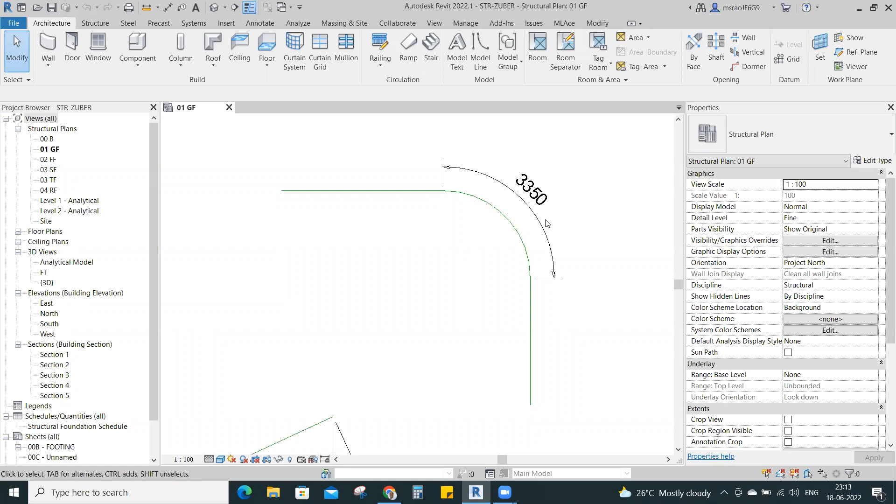So to create a different dimension, again we need to select one object. If you select this dimension, you can see the edit type. If you observe our entire journey with Revit, whatever we required, we are going to edit type. Whatever we want to create new, we go to edit type. So without edit type, we cannot imagine anything in Revit. So now to create a different dimension style, I am going to edit type.

In the edit type, I create a new type by duplicating the existing one. Let's say if you see the type here, we already have different types. A few of the things: arc length 3mm arial, arrow 2.5mm arial. Different dimension styles are there. Now I want to create my own dimension style.

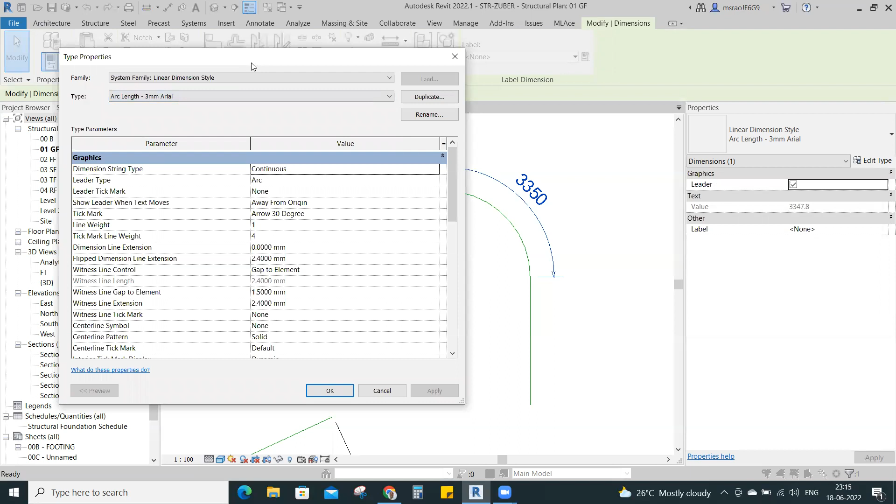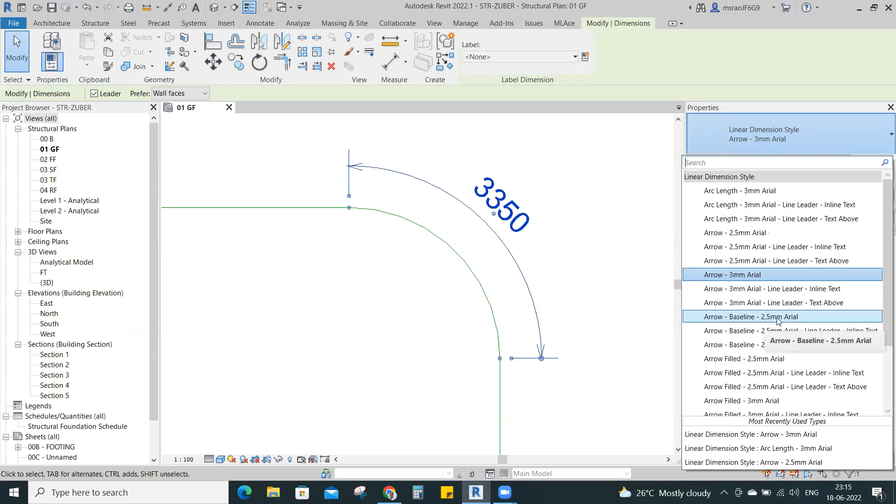Let's say, before creating the new one, let us change the one dimension style with a different style. This is one style which is linear dimension style, arc length 3mm arial. Next I am going to change to arrow 3mm arial. See, small difference, more or less looks the same. And I am going to change into arrow baseline 2.5. Looks more or less the same.

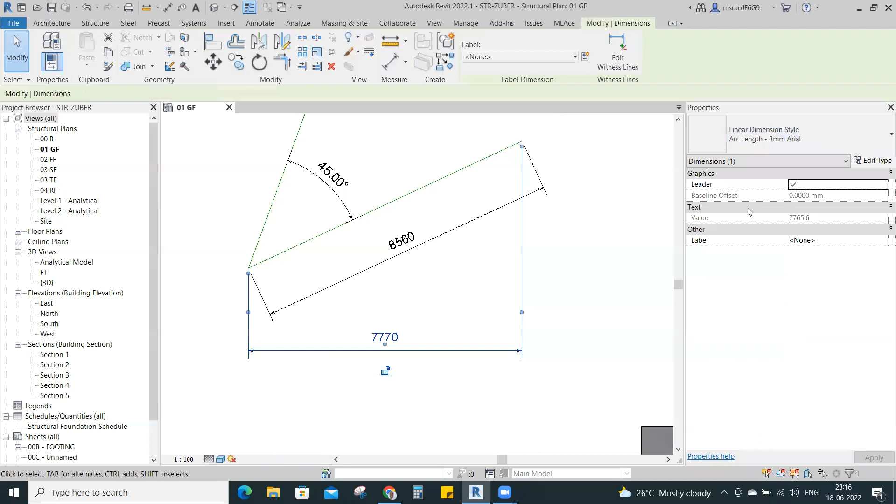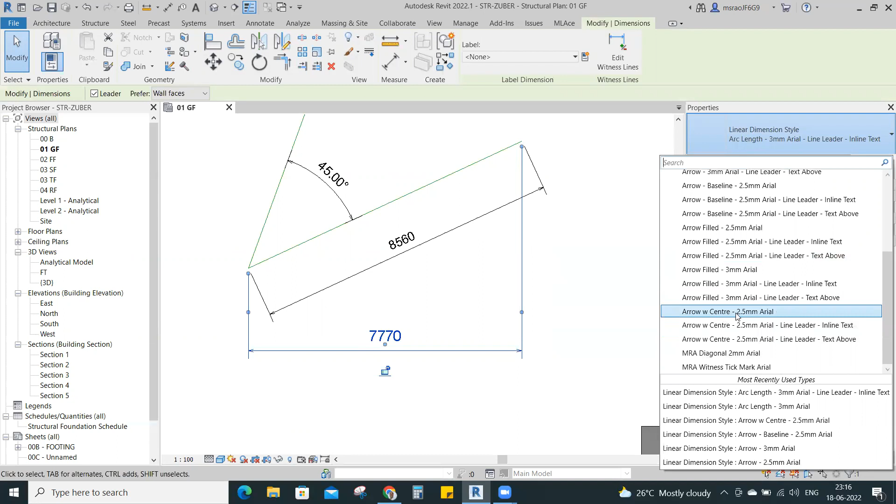I'm going to change this dimension into a different dimension style, arrow W center 2.5 arial. More or less same, we cannot see any difference. Let's say now I'm going to change to arc length 3mm arial, then arc length 3mm arial with line leader and inline text. More or less same. And if you change into 2.5mm, see, only the dimension text height is changing.

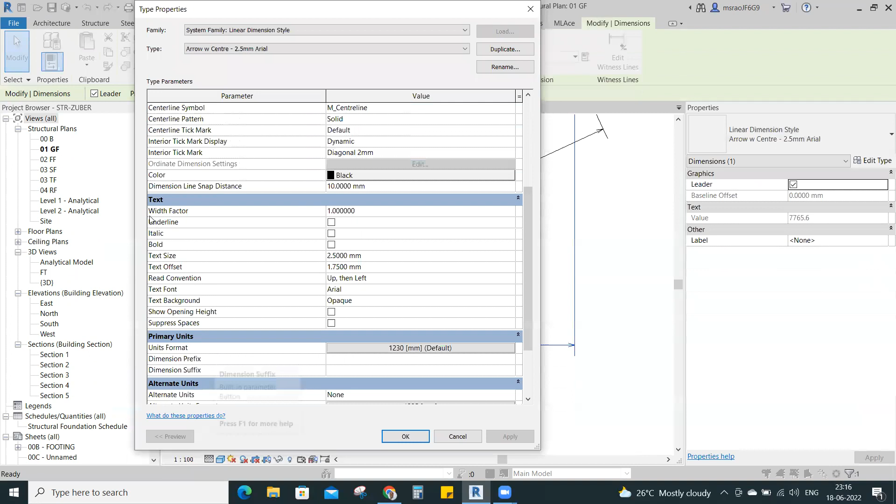If you go to edit type, here you can see the different dimension variables, or dimension parameters. If you read one by one: graphics, text, primary units, alternate units, and other things. In the text, you can see the text size is 2.5.

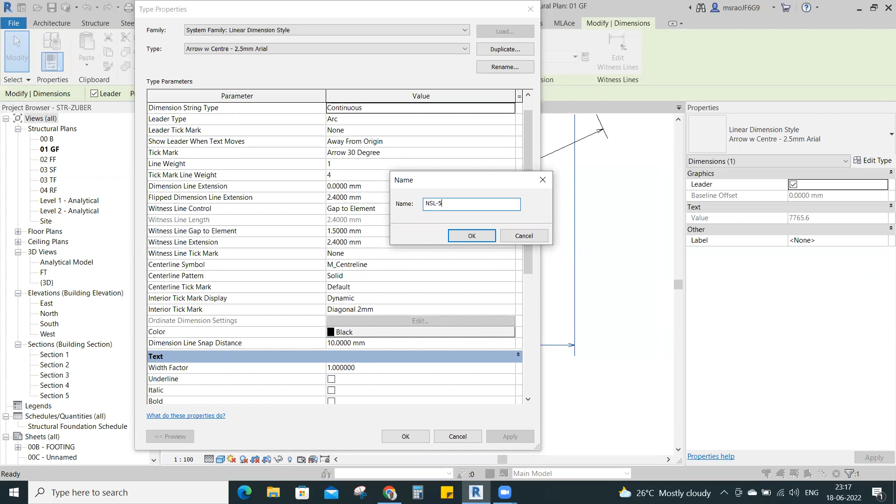Now I want to create one dimension style with the text size of 5mm. Now I'm going to change only the dimension text size. Let's say now I'm going to duplicate it. Here I create the new style, NSL hyphen 5mm. This is my style name.

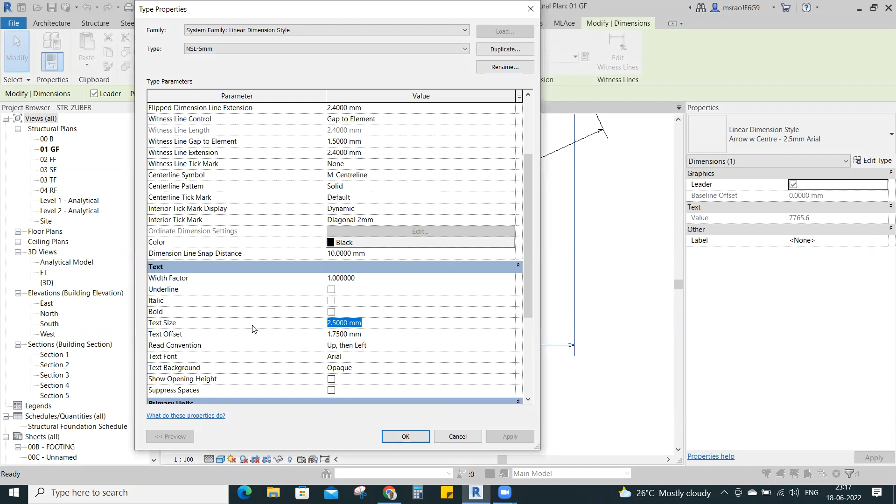So now what is the parameter I need to change? I need to change the parameter called text size, from 2.5mm to 5mm. Apply. See, now this is the style NSL 5mm.

If we want to go back, you can change it, it will change to the different style. Right, I'm going to select this - this is my new type of dimension. When we use Revit, we call a style as a type. Just I'm going to the edit type.

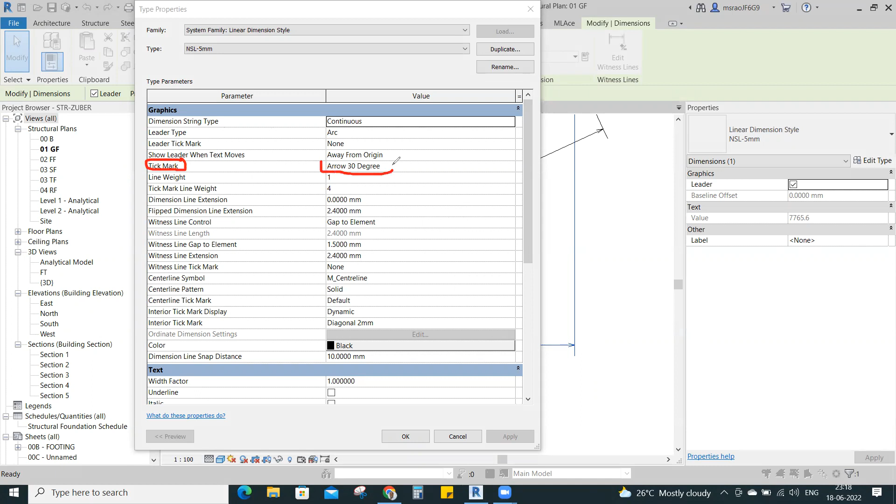Here I want to change the arrow style to the architectural tick mark. Again, if we read one by one, dimension string, tick mark is there. What is the arrow we have here? Arrow 30 degrees. Right, now I will change these things.

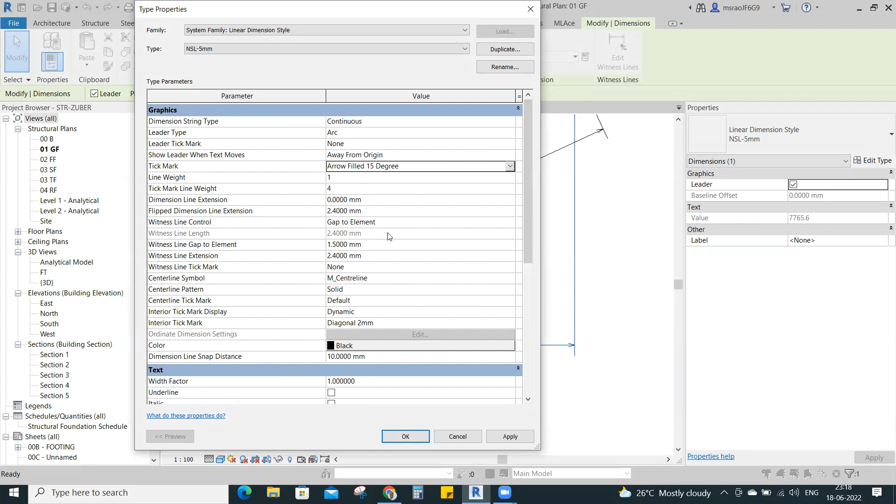I will go to tick mark and change to a different arrow type. These are all different arrow types. Let's say I want to create arrow filled with 30 degrees or 15 degrees to see the difference. If I apply, see, this changes the arrow style.

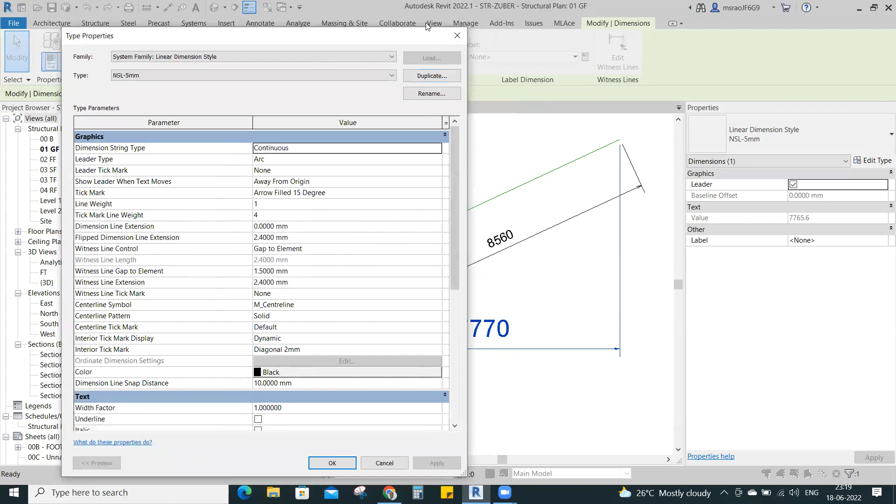Like this, we have to edit. Let's say to create the dimension style the first time, we have done the duplicate. After that, we are just editing, we are not duplicating anything because we already created our style. Now we are changing internal parameters only.

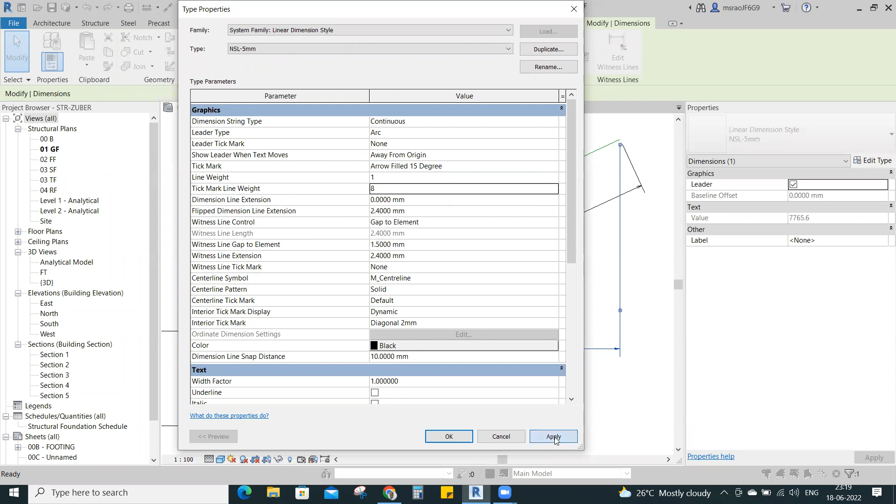Let's say, for example, line weight and tick mark weight. If I want to change, let's say, to 8 units tick mark, see now you can see it like this. When you go to thick lines and thin lines, you can see the difference.

If you want to change the thick lines and thin lines, just use the command called TL, thin lines. If you click again, we can see thin lines, thick lines and thin lines. We need to remember this option one more time: thin lines and thick lines, TL is the shortcut. If you place the mouse there, it will show the shortcut: thin line, thick line, TL.

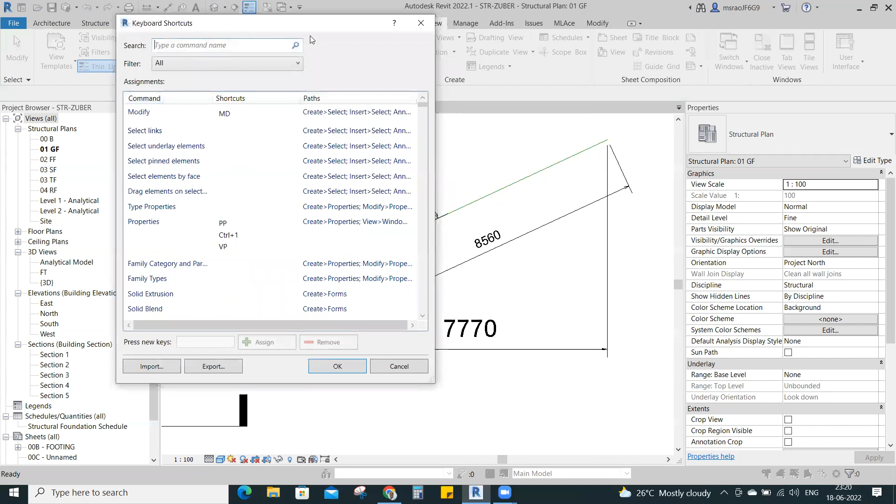By the way, I want to add one more command called keyboard shortcuts. If you go to user interface in the view, here user interface, keyboard shortcuts, we can manage our keyboard shortcuts. Let's say now we are using TL for thick lines and thin lines. Let's say, for example, I want to see others: for modify, MD; for property, PP; and trim or extend.

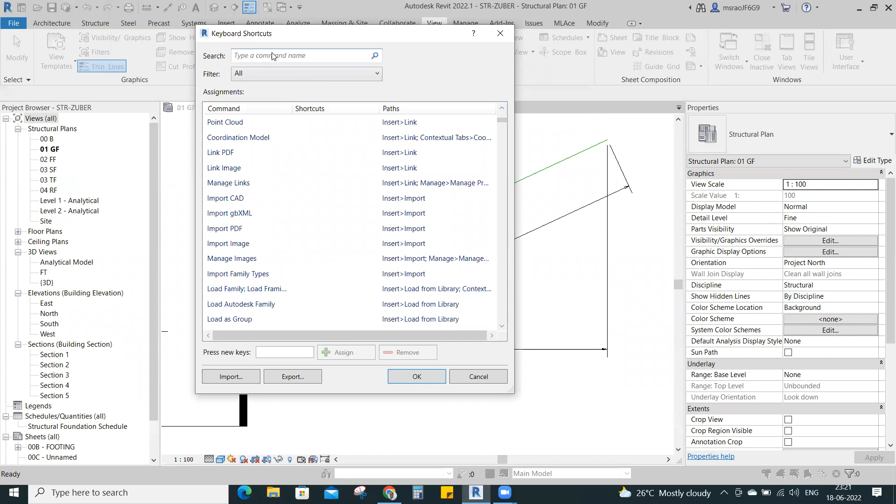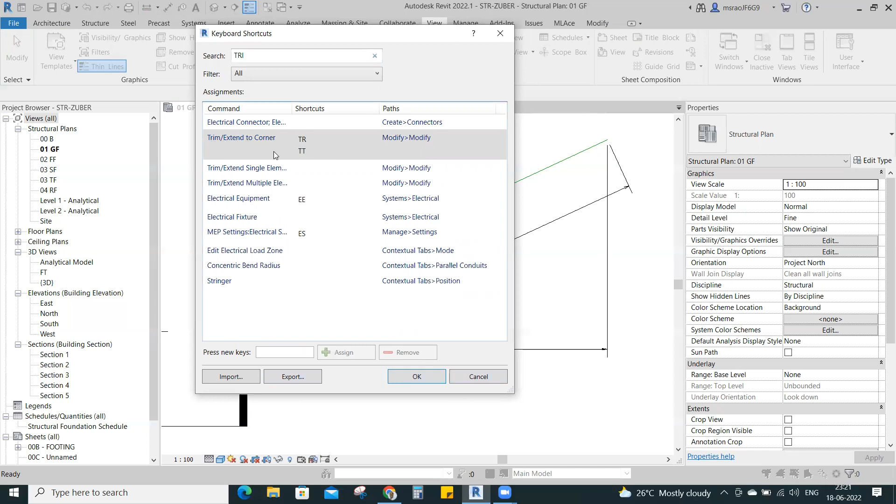See, trim or extend to the corner TR. Okay, electrical - these keyboard shortcuts are there. If you want to change them, let's say I want to use something else, I want to add TT. If I give the add TT, when you click TT, it will work as a trim or extend command. If you want to remove, select and you can remove. What I mean is we can manage our shortcuts according to our flexibility.

Only thing is here we will not use the enter, so we need to type only the shortcut.

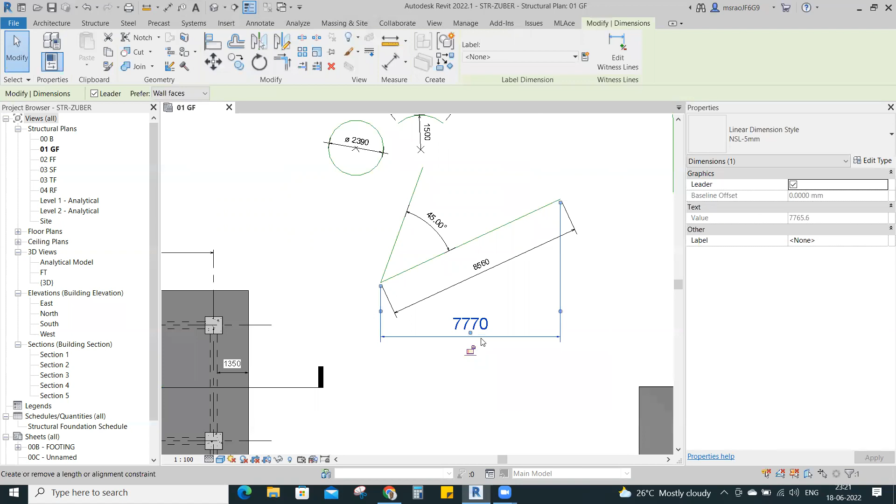Again I'm going back to the dimension style, go to edit. Here you can see the different witness lines. Let's say color of the dimension - these are the very frequently used factors. Now I changed the color of the dimension.

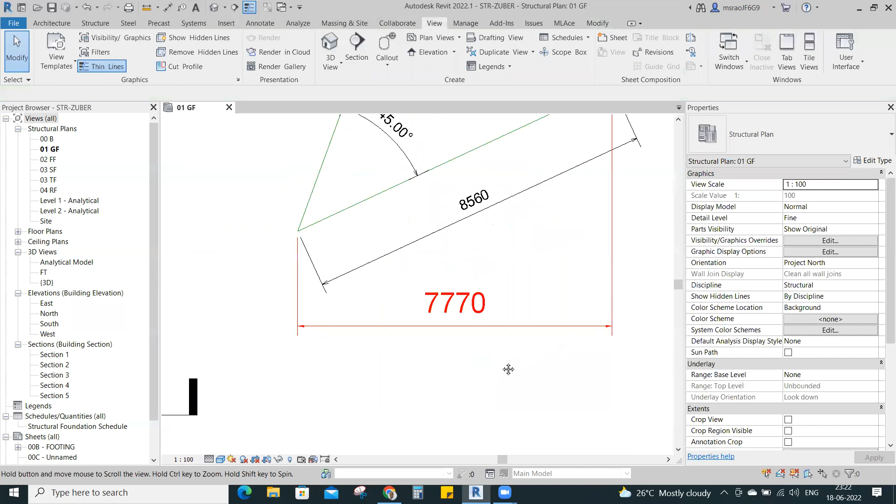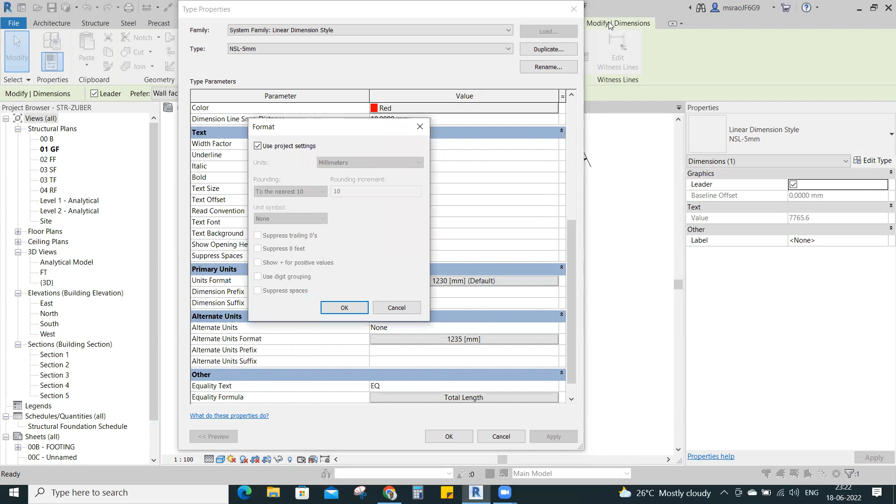Again I'm going to edit type. Here I'm going to the primary units, and I'm going to the alternate units. Primary units, it's already in mm. Now, if you see one option here, this is also one of the important options: use the project settings.

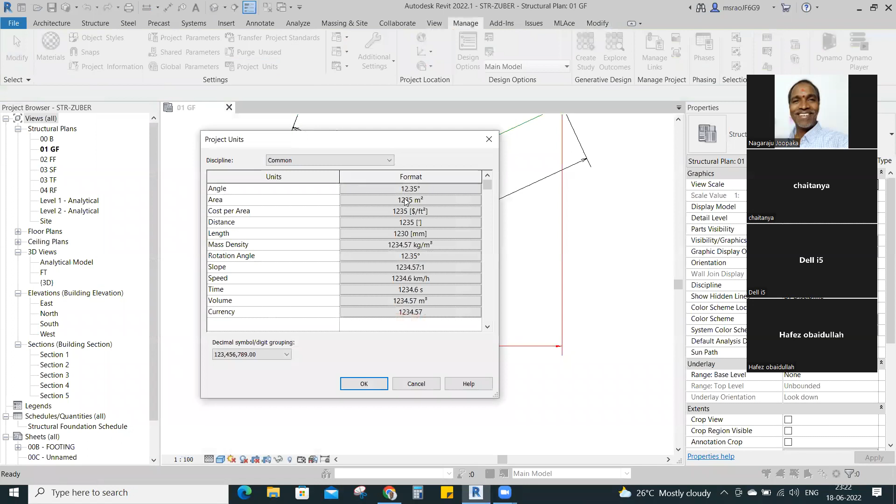This means, let's say if you go to the command called manage, sorry, manage project units, whatever we are setting the dimensions here, it will reflect here, in units parameter, primary units. If you remove it, you can change according to your requirement.

Let's say I want to change for a particular dimension style into feet and inches, feet and fractional inches. I'm going to make it, apply. See, now you can see it in feet and inches. But our project is in mm only, in millimeters.

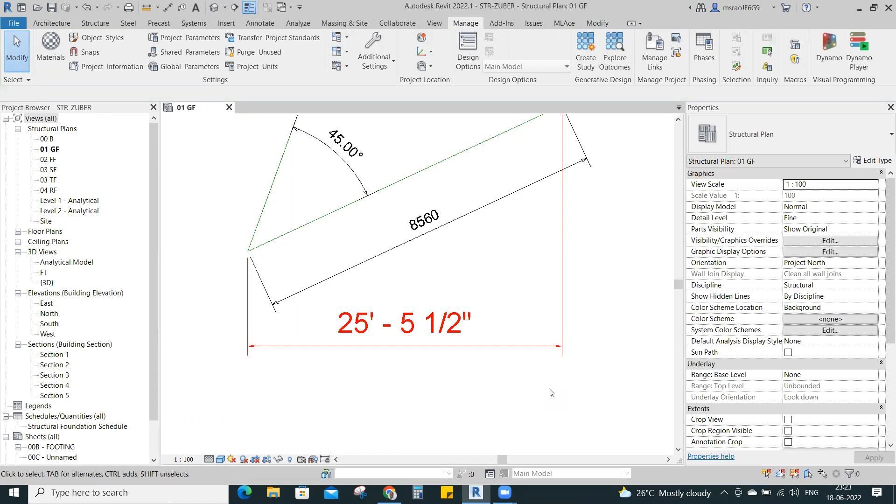But I can change a specific style with my required units. These are the primary units, you can say. If I want to use according to project template standards, I will use the project settings. Now it will change automatically according to the project.

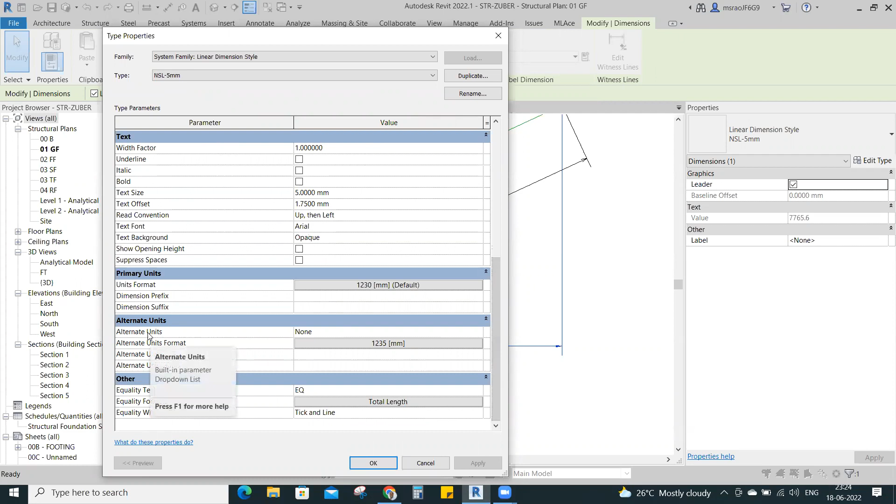Again, I am going to edit type. Here, alternate units - this is also one of the important options. Let's say I want to see my units in mm as well as feet and inches. So here I will go to this alternate units, to the right side or below. Which side do you want? Let's say I want to use below the dimension. What is my alternate units? I want to use my alternate units in feet and inches, or else only inches.

Okay, you can see the alternate units. If I want to use feet and inches, I will go to the alternate units. I create feet and fractional inches.

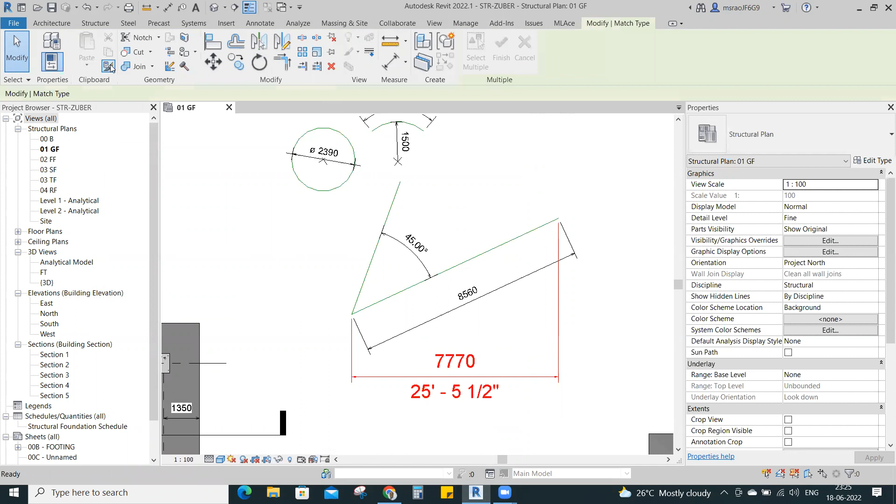Like this, let's say now if I change into these units, select it, I will go to match property, modify, clipboard match property - this property changes automatically to this.

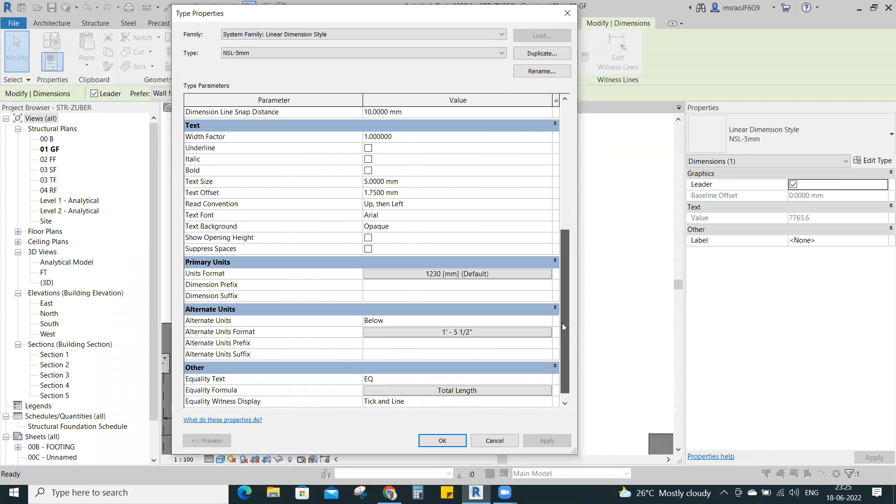This is a way to create our own dimension styles. Now I'm going to edit type to see all the parameters. I request one thing: while practicing, read each and every parameter, what is available there, so that you can understand. Whatever I explained, these are the very important things which we use.

For general projects, let's say we use dimension styles like bold or italic. So these kind of things also we can do - now we can get the bold and italic. I hope now it's understood: whatever we need to change for the dimension, we can manage with the edit type of that particular dimension.

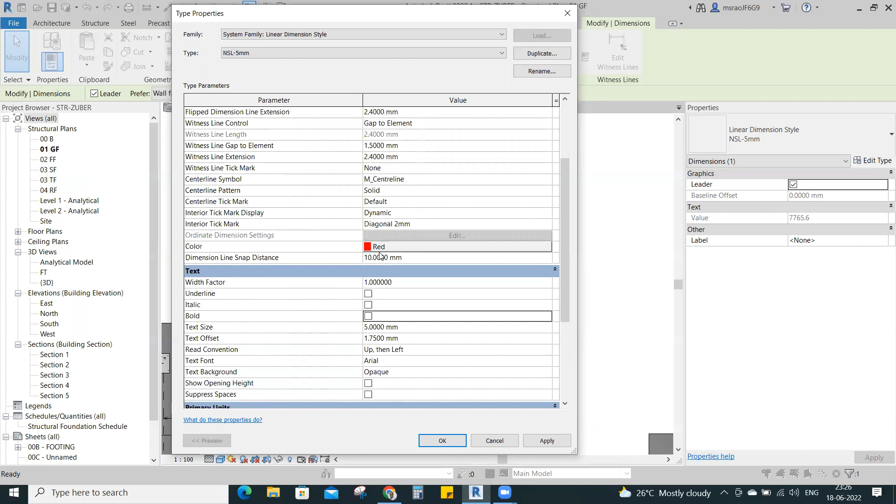One of the major things is text background - this is one of the important ones. Let's say something is overlapping with other objects; if you want to make the below object transparent, I will go here and make it transparent. We can see later also about this, just for information I'm giving.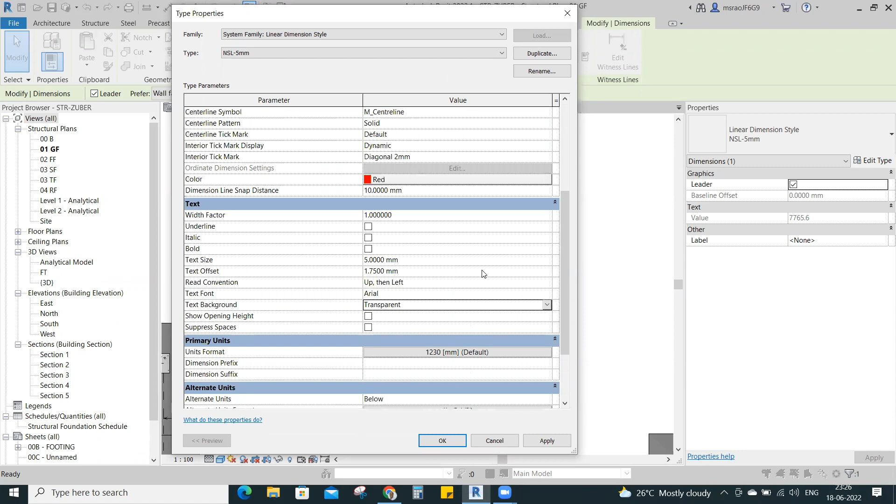These are the major required parameters of the dimensions. Let's say if we created any sheet, if you place the dimensions, it will reflect.

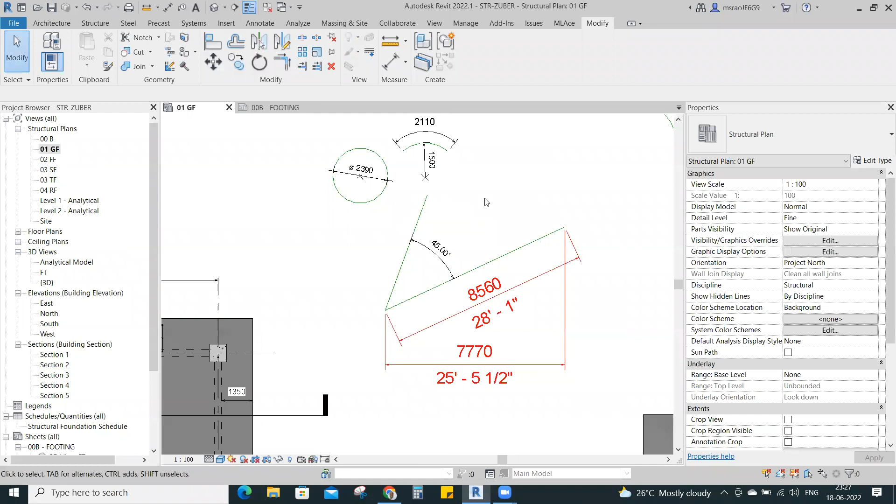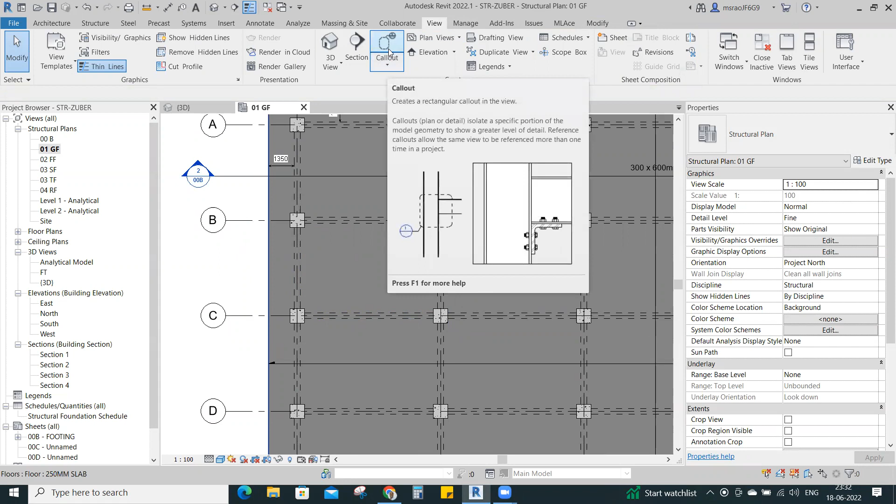If you want to create any detail for a specific area, we have the command called callout. Just go to the callout. Here, for however much area we require, we need to draw a box with this reference number. When we draw this box, you can see that one drawing has been created as a callout. If we go inside, this is only the specific area we can see.

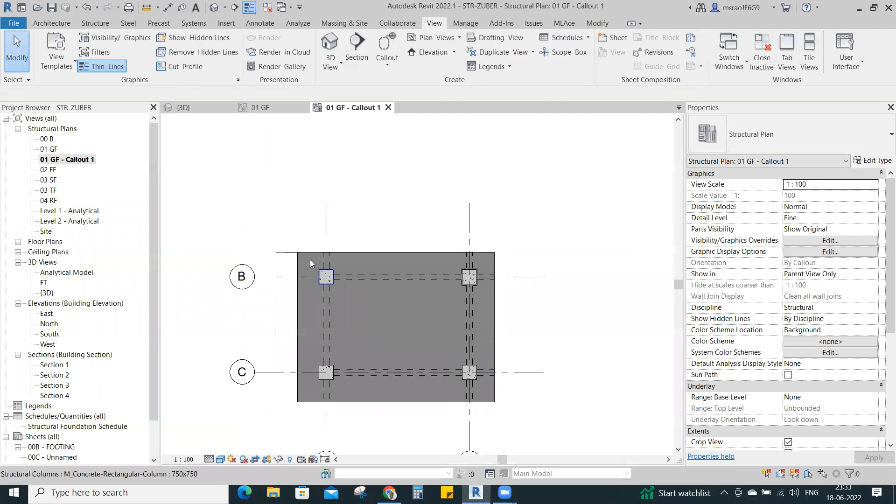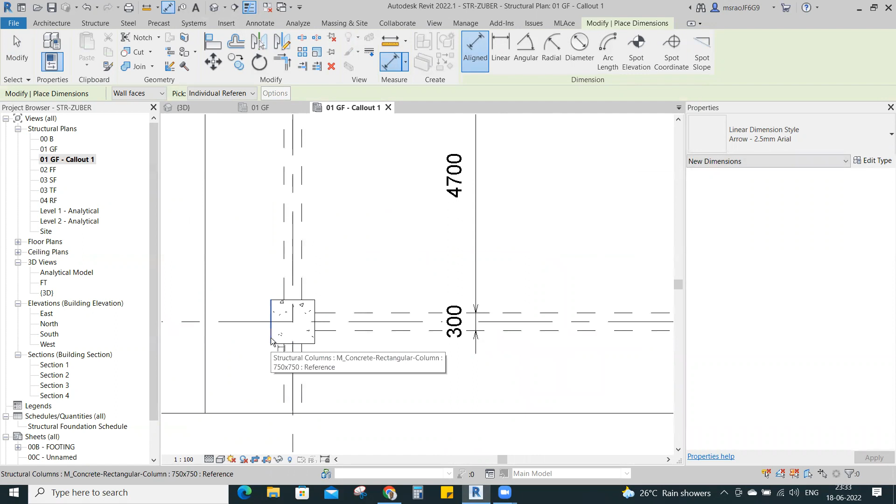Now I'm going to the area. Here you can give any kind of dimensions - let's say I want to add some specific dimensions, and for example some column dimensions. Let's say I want to add some tagging, for example beam sizes.

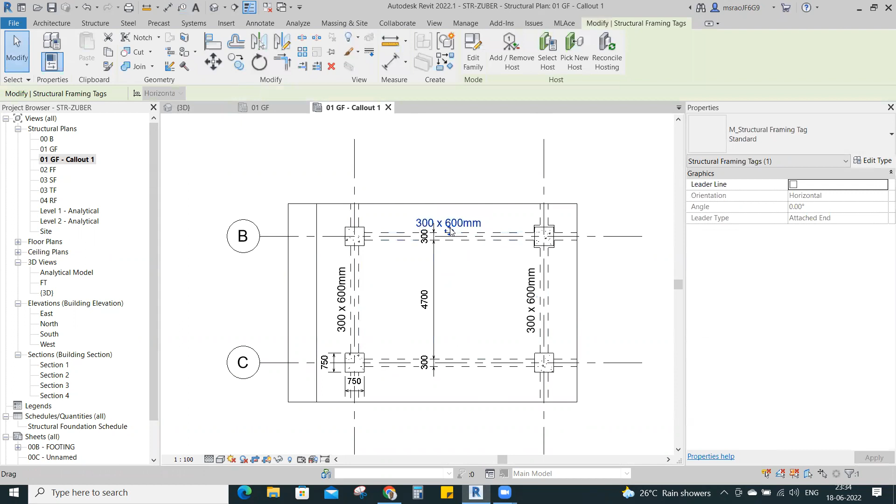If you want to avoid overlap, you can move it like this. This is a detail drawing. If you want to place this detail drawing in the sheet, I will go to my sheet, whatever I created, and I can drag and drop it here. So just for your information, I'm placing some data.

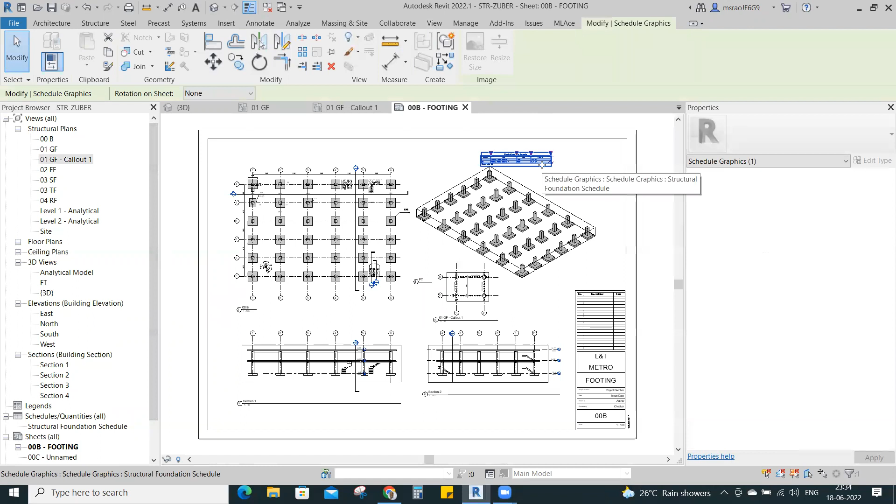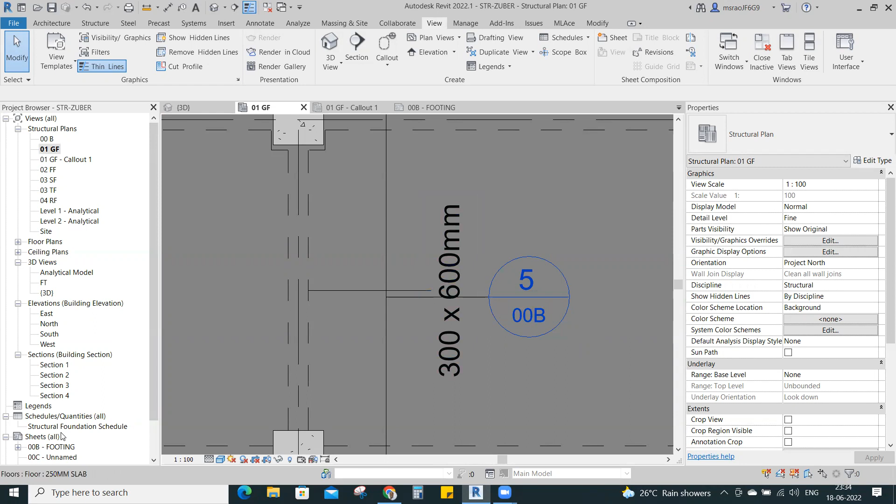Up to this, is it clear? Now I want to start the architecture with the help of this.

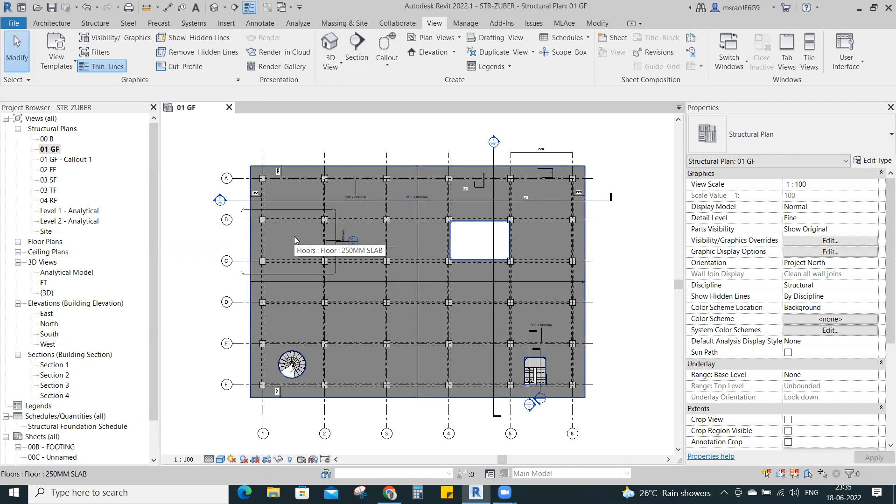Sir, here I have one doubt. In the column details, can we show the reinforcement detail also, like the rebar, 20 mm rebar, like that? Yes, we need to add the rebar there. If you add the rebar, we can see it.

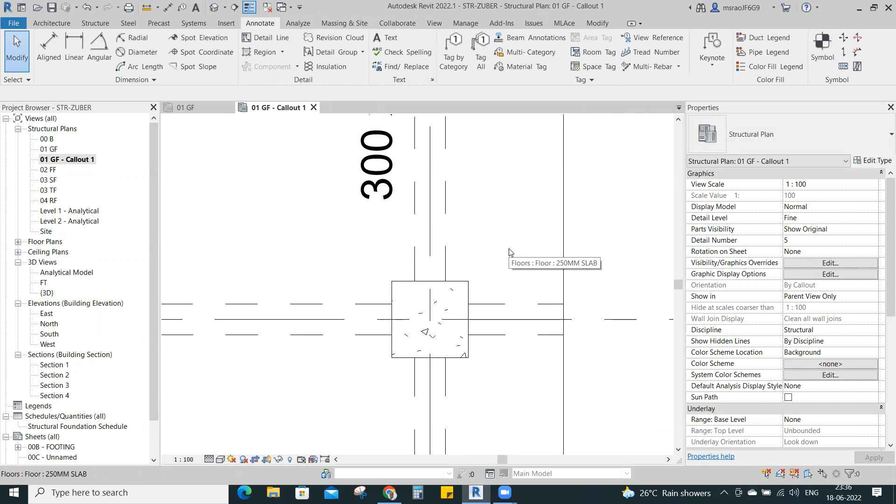Let's say, for example, without rebar also, you want to show something in a graphical way. Here we have to draw with annotation commands, lines, that kind of thing. But if you place the rebar, it will reflect. We will discuss this in the next session. I've given the basic framing details of the structure and not covered the reinforcement.

We will discuss it in the next stage. First, we need to get a grip on Revit, then we will go a little bit deeper, right?

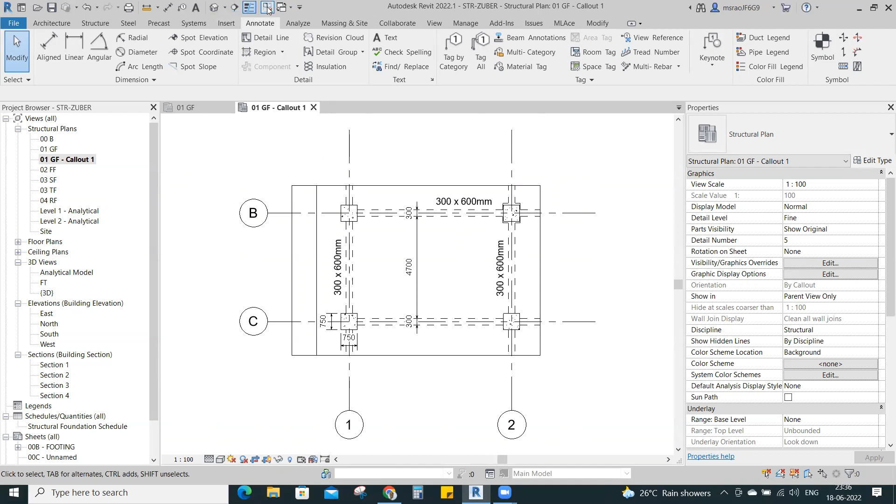Now I'm closing this. I want to create a new architectural project. Let's say I'm going to new, browse. Here I will use the default metric, which is nothing but an architectural template. I'm going to open it.

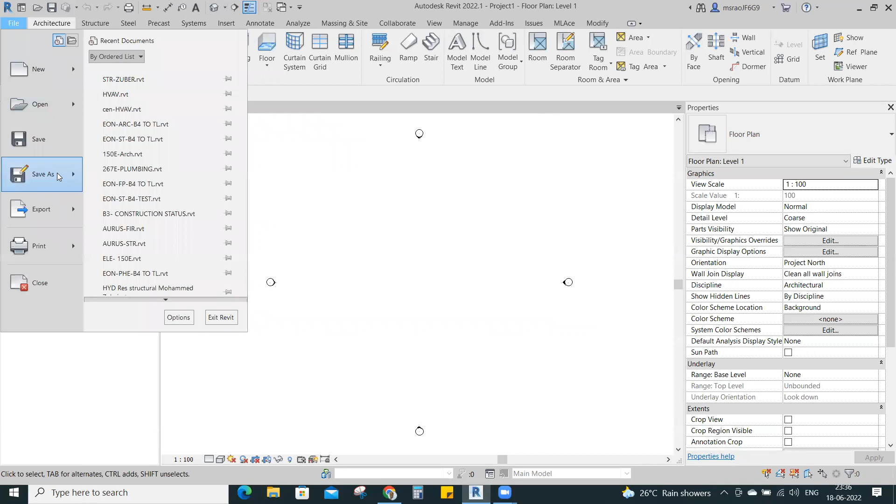I'm going to save as a file, save as project. Let's say I want to go to a specific folder. This is the structure there. Now I am going to create ARC ZUBER, and save.

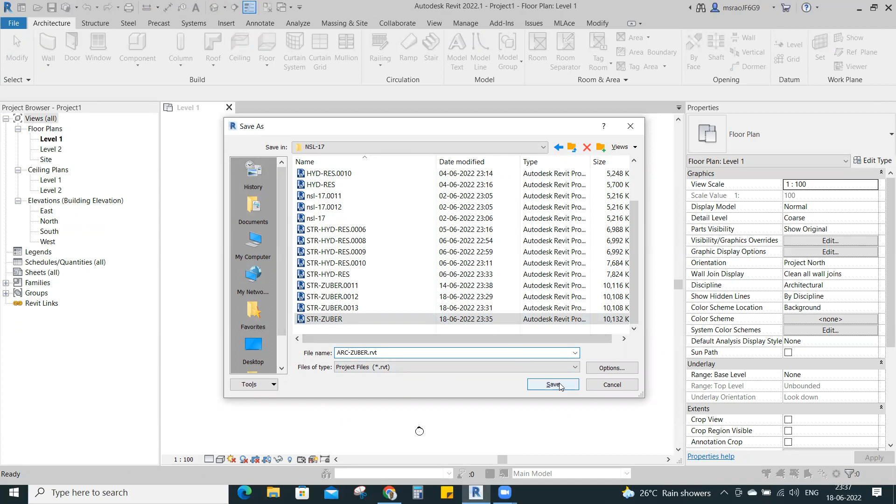Here I want to bring my structural model into the architecture model as a reference. It's just like an XREF in AutoCAD. I will go to the Insert tab.

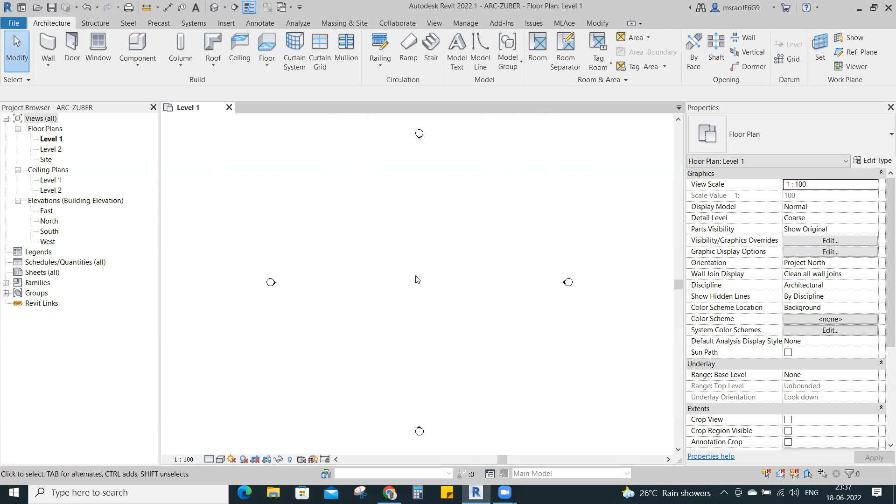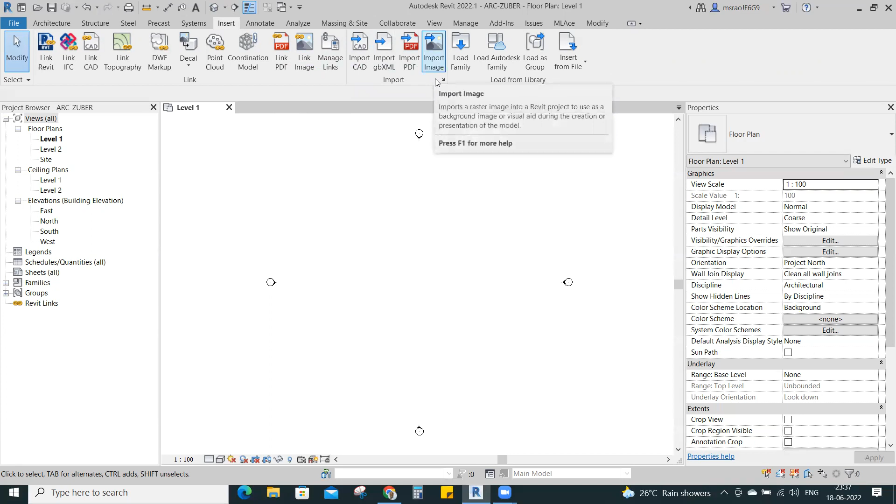When we look at Insert, we have different options: link Revit, link IFC, link CAD, link topography, link PDF, link image, import CAD, import PDF, import images, load families - we know about load families and why we use it. So we have different options, meaning we can link a Revit file, IFC file, CAD file, PDF, image, anything.

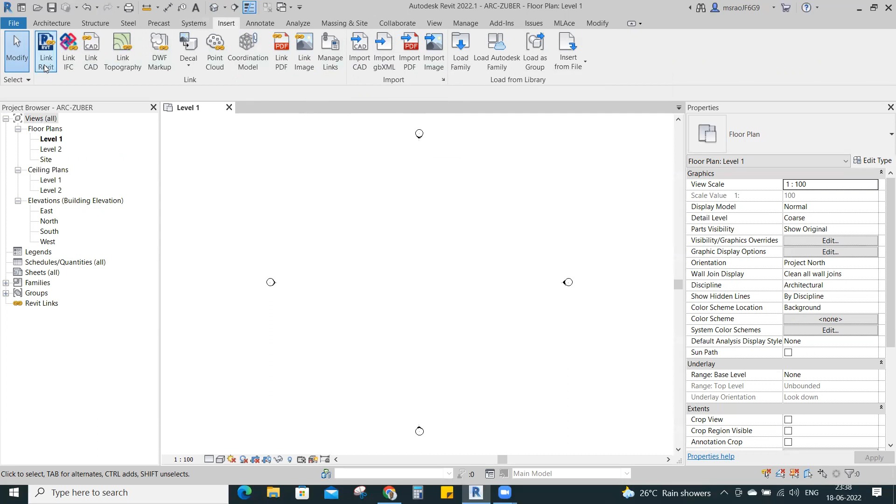Now we are going to insert or link only the Revit file. Click on link Revit. Here we need to choose our structure, select the structure.

When we select the structural model, we have different options. One is the file name and file type, and this is one of the most important: positioning. If you see the positioning - I hope everybody can see, right? Positioning.

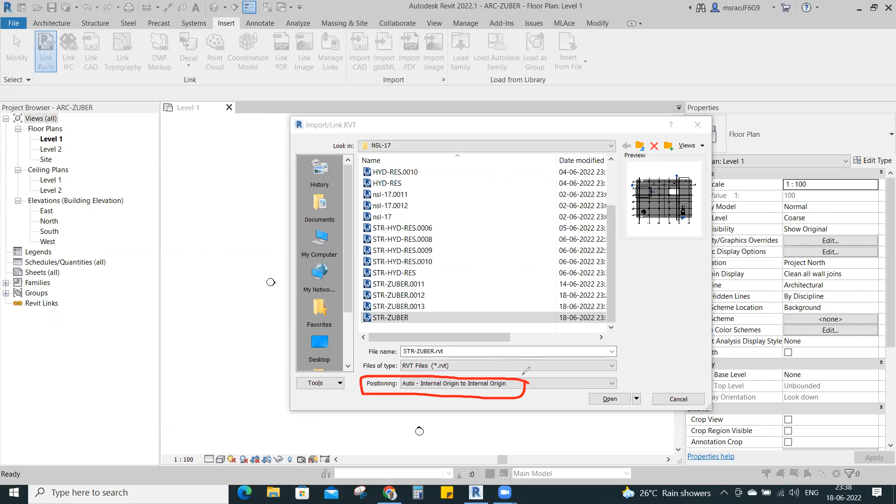In the positioning, you can see auto, internal origin to internal origin. Before going to open, I want to discuss a few things about positioning. Let's say, for example, now we are working with AutoCAD. When we are inserting blocks or double blocks, we use the option called 0,0, nothing but origin, correct. In the same way, here we use the positioning as origin to origin. It depends on the project, but generally 90% of the time we use this option, origin to origin.

If we go a little deeper, what positionings are there? Here we have auto center to center, internal origin to origin, and by shared coordinates, project base point, and internal origin - these are the manual things. Wherever you want, we can place a manual center, manual base point. At the moment, we will choose origin to origin as default.

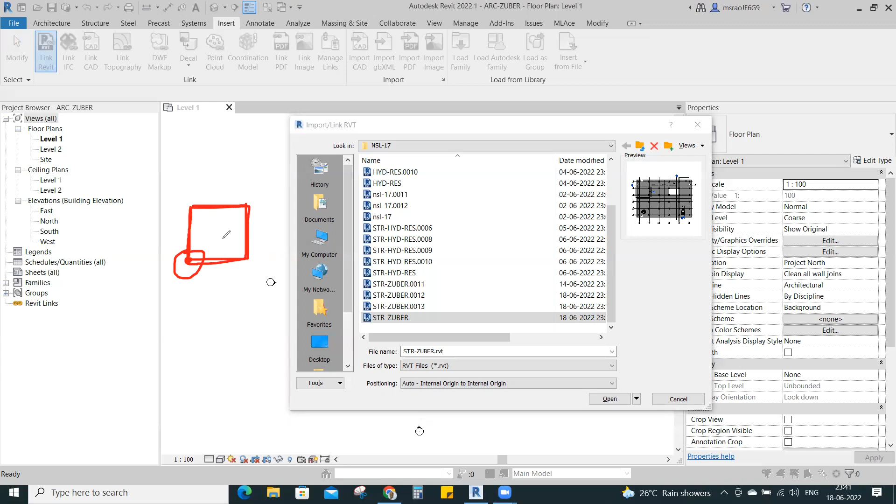If we see center to center, what will happen? For example, this is my architectural model, let's say this is the center of the model. If I link the structural model, the structural center and architectural center will coordinate and place like this. If you use origin to origin, let's say this is my origin point, and the architecture origin also will sit at the same location - origin to origin. So it's based on our requirement we need to use this option, but most of the time, most projects use origin to origin as a thumb rule.

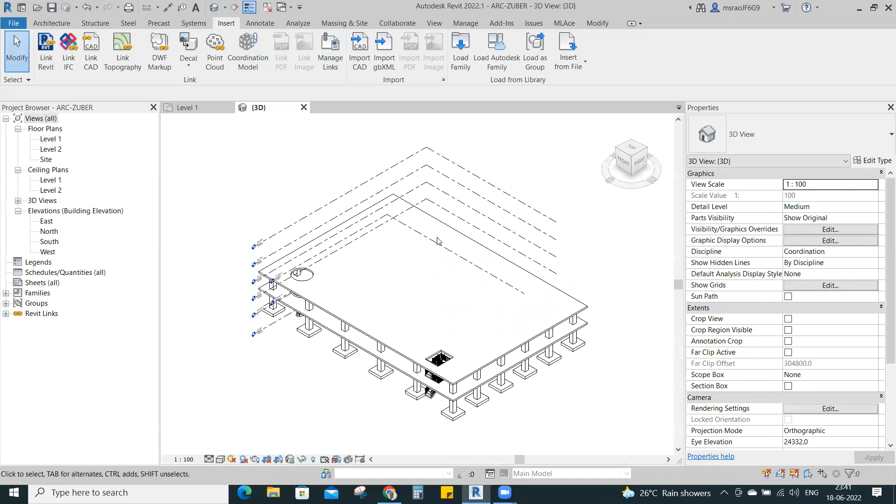Let's say I'm going to select structure Zuber and open it. When you click OK, this model will be placed in the architecture model. If you go to 3D, you can see - this is only a link, only link of the structure.

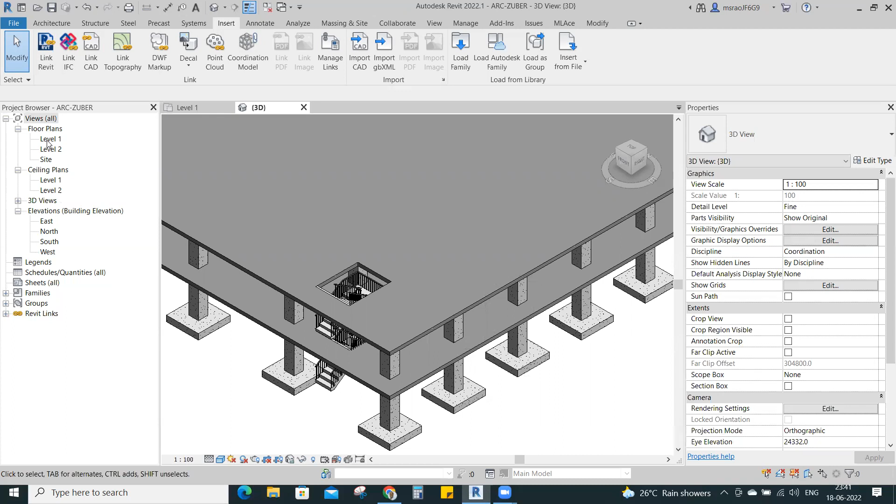I am trying to select this structure model, but it's not selecting. I'm going to level 1, I'm trying to select, it's not selecting. Why it's not selecting is one of the most important options - if you see the bottom right corner, we have different options. This first option is the link.

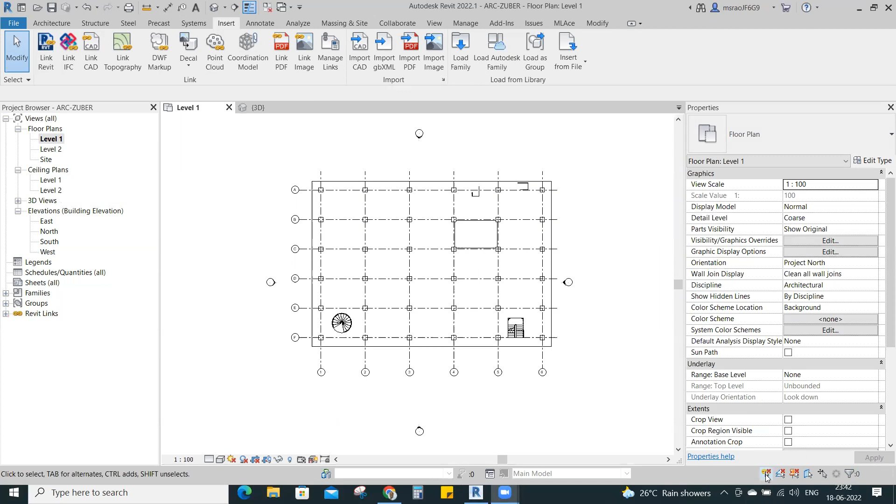When I place the mouse here, it is a lock. If I unlock it, I can able to select. To avoid unwanted movements, we lock this link, select link option, so that it will be fixed.

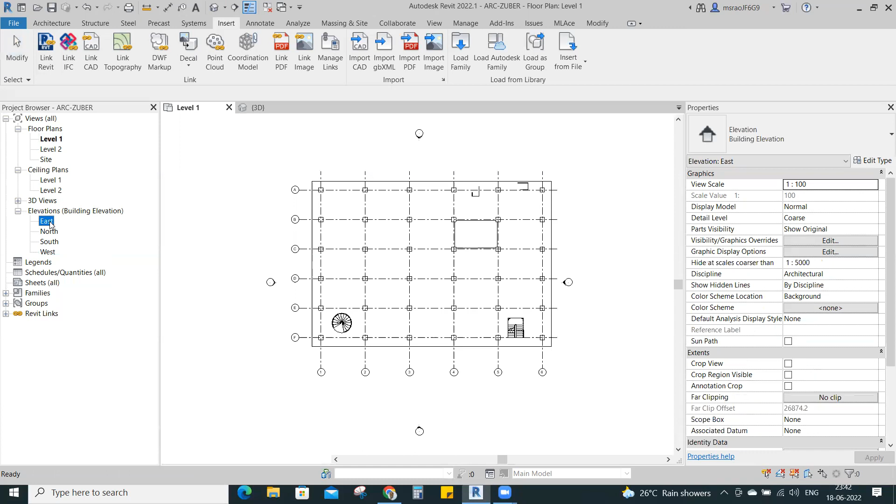After linking, our next task is to create the levels. To create the levels, we need to go to any one of the elevations. If you take any template, by default we will get 2 levels, level 1 and level 2. If you see the linked model, we have all levels: basement, ground floor, first floor, second floor, third floor, and roof.

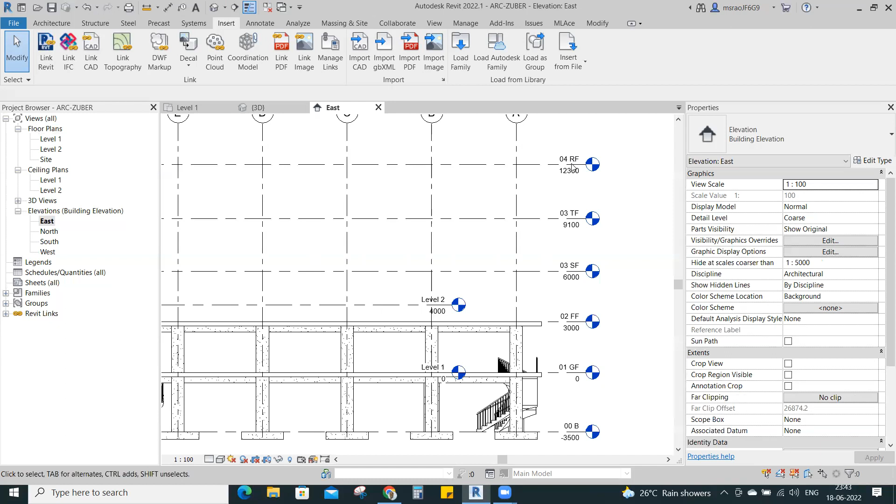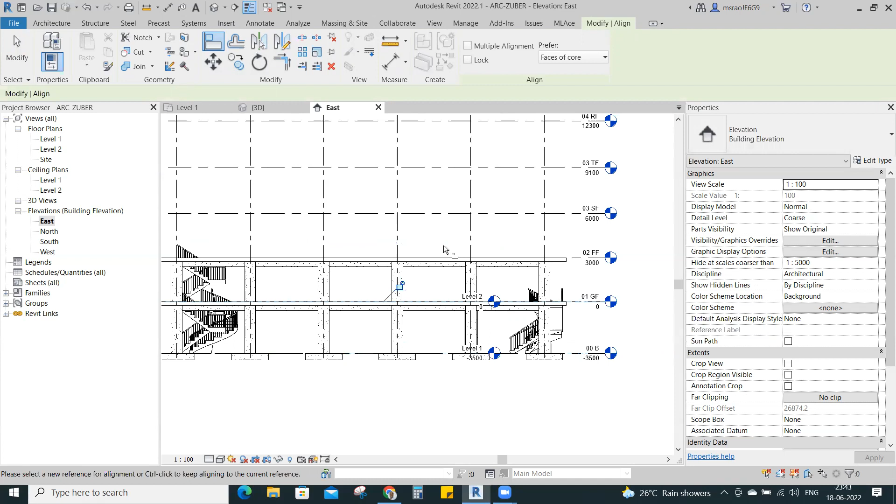I want to maintain the same levels available in the structure, so again I need to draw my levels. Let's say, for example, I want to align to this basement. Go to modify, align command. I want to bring level 1 to the basement, and ground floor to level 2, because I want to use these 2 levels.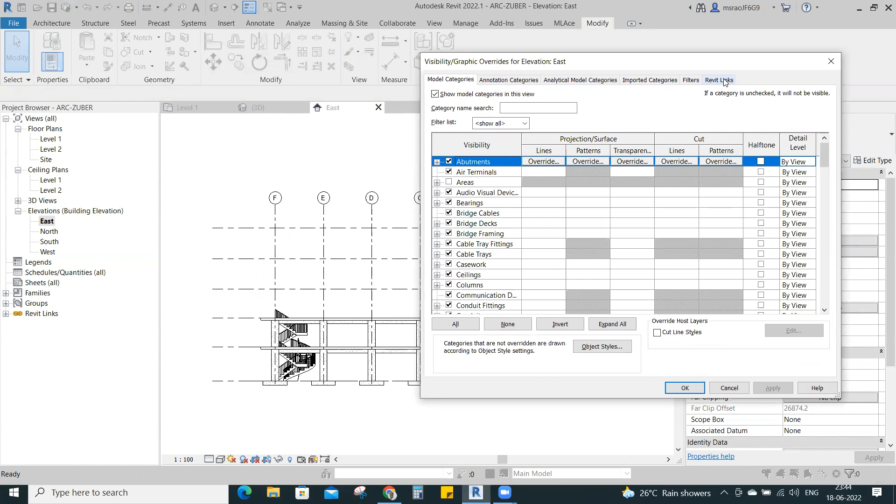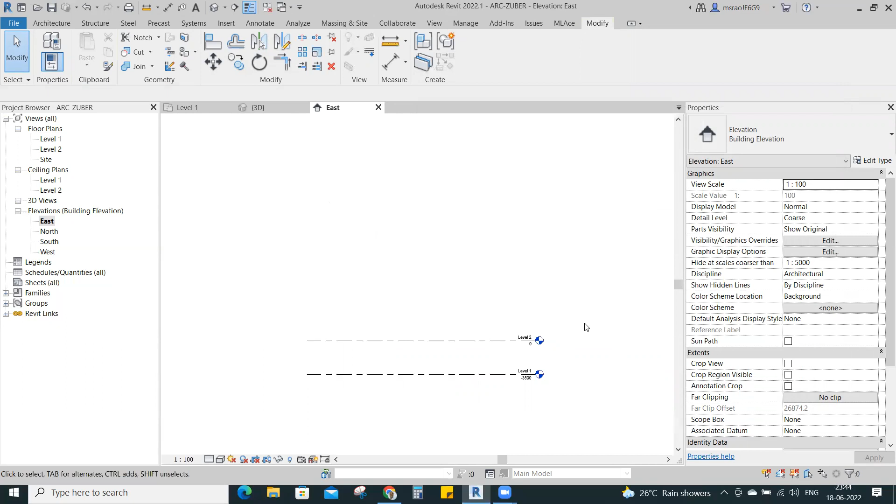Now I want to switch off my Revit link to see my levels. I will go to visibility graphics. Here you can see the Revit links. If you go to the Revit links, here you can see the structural model which we have linked. I want to switch it off. Now you cannot see the linked model. Again, I'm going to VG, Revit links, switch on.

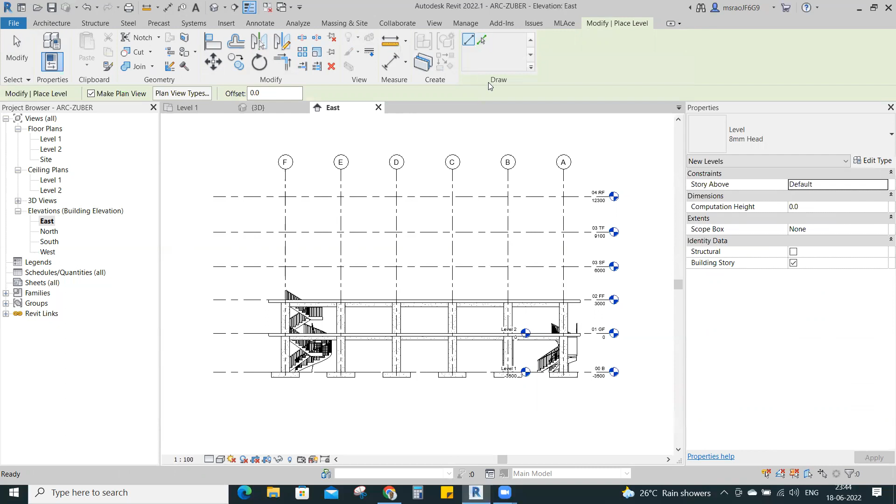Now I want to create the same levels available in the structure. I will go to architecture, levels. When I click levels, I have two options: one is line and one is pick line. Line means you can draw it as it is, over here. Let's say, for example, one level I want to draw like this.

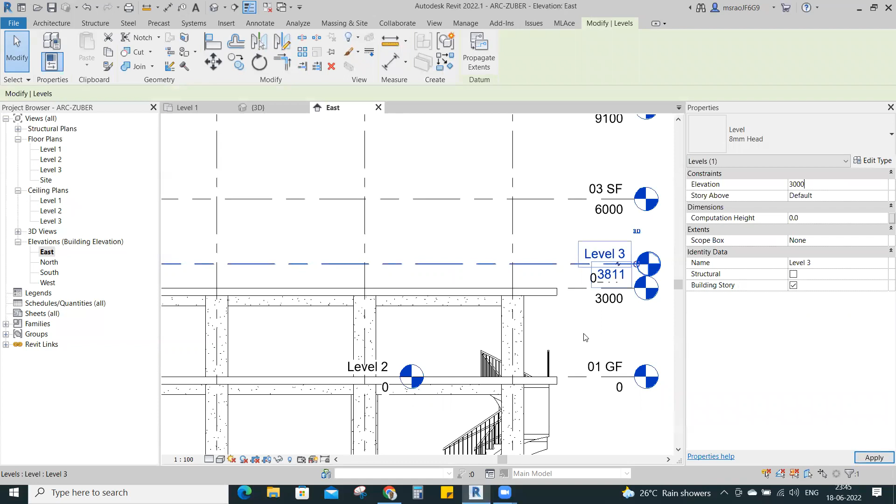When I draw the level, I can see level 3 here. I want to align it. Go to modify, or I can select it and change the elevation to 3 meters. Or else I will use architecture and level.

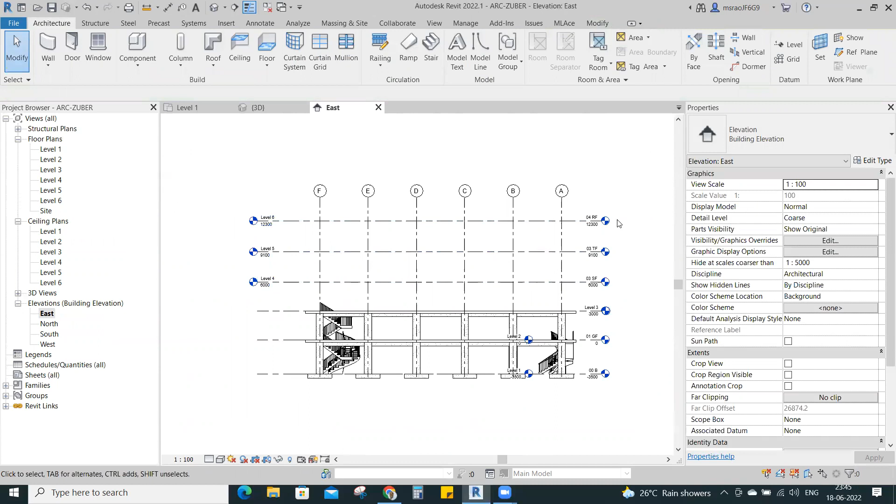This time I will use the pick line command. Just select pick line and click on the existing lines, and you will get the levels - no need to draw one by one. If I switch off the Revit link, you can see the new levels. You can adjust like this, and it will get connected.

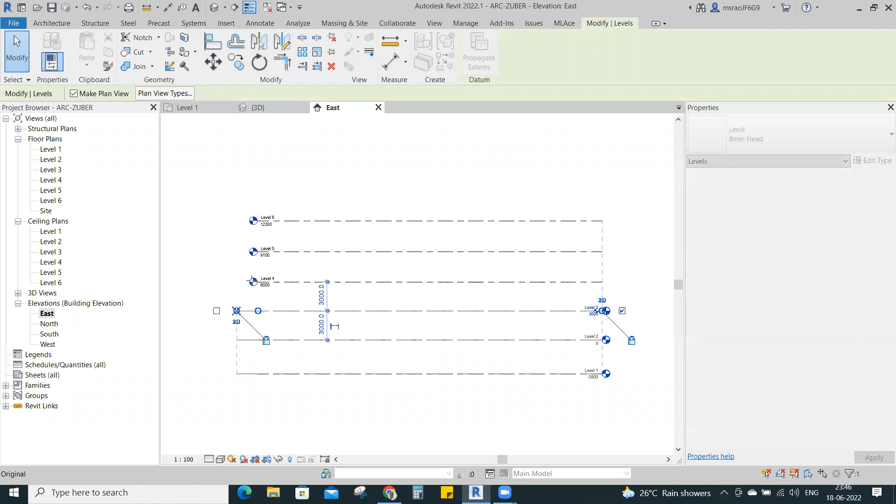If you want to see these elevation symbols all together on one side, now I want to change these symbols to the right side. Select, switch off, switch off, switch off. Here you can make the tick.

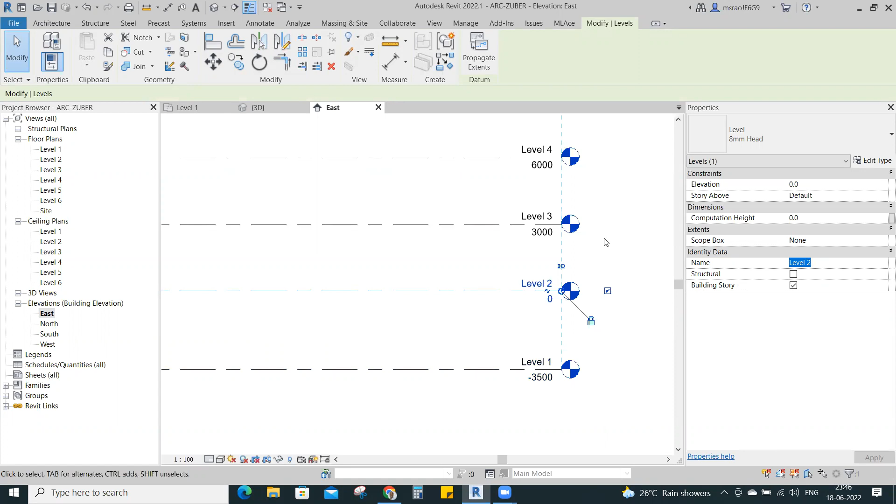But the naming we have to do manually again. Let's say select and change the name, same as the structure. Select the level and change the name. Select and change the name like this. Right, we know this process.

Go to visibility graphics, switch on the Revit link. Now you can change - this is the basement, ground floor. What is given in the structure model - is it the same name or a different name? We can change and rename it.

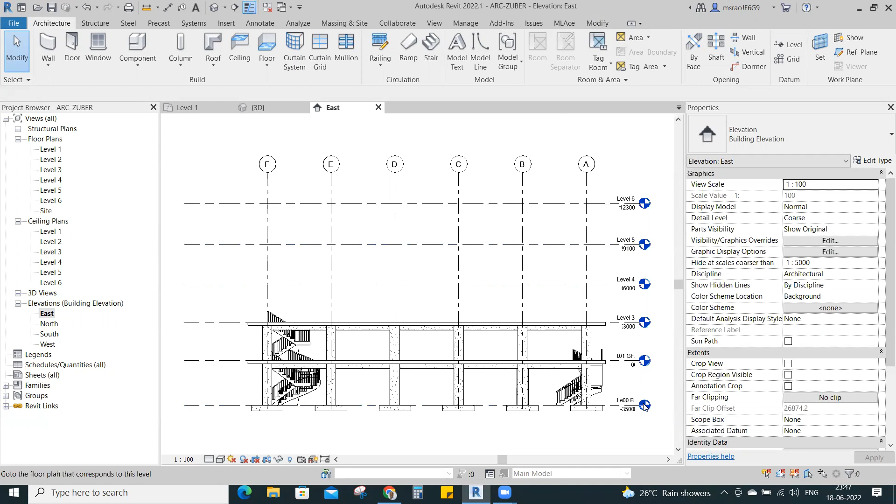Now I am going to, let's say, the basement level. What is the basement level? Level 1. So I may get confused about what is the basement level, so I will use the same name: 00B. Yes, now I can see the 00B. If I go there, this is my basement level.

Now, grids are already available. From where do we have these grids? We have the grids from the link itself. If required according to this, we need to draw the grids again. Just go to architecture and grid. Now I will take the pick line.

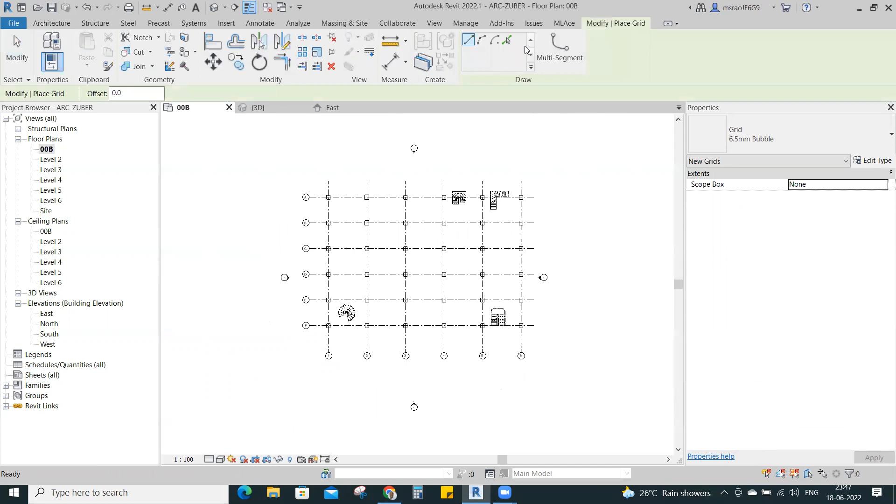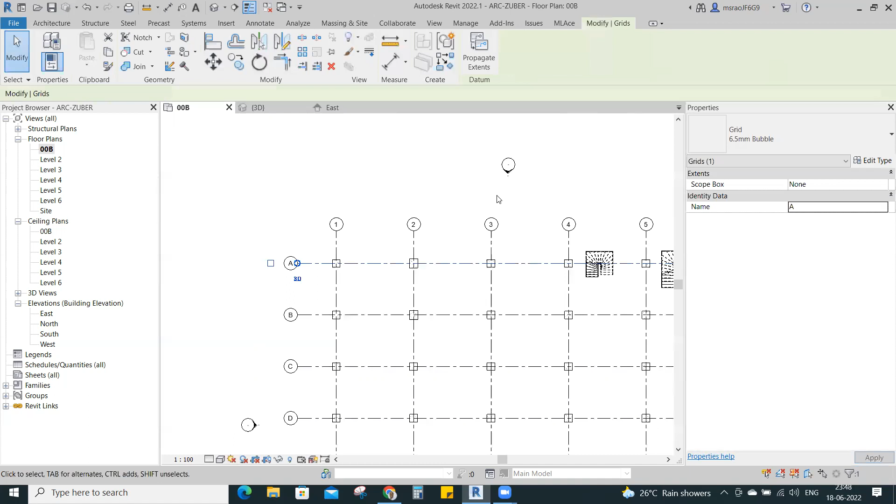1, 2, 3, 4, 5, 6. Okay, now this is, let's say for example, A, B, C, D. Grid, pick line, and change this first name to A. Then grid lines, pick line, B, C. Automatically it will create - these are the levels.

Now if you switch off this Revit link also, we can see our grids. We are creating a different model for the architecture with the help of structure, so why are we using the same levels and same grids from the structure? Because we should maintain the same alignment. For any project, we need to maintain the same alignment. This marking is a one-time task.

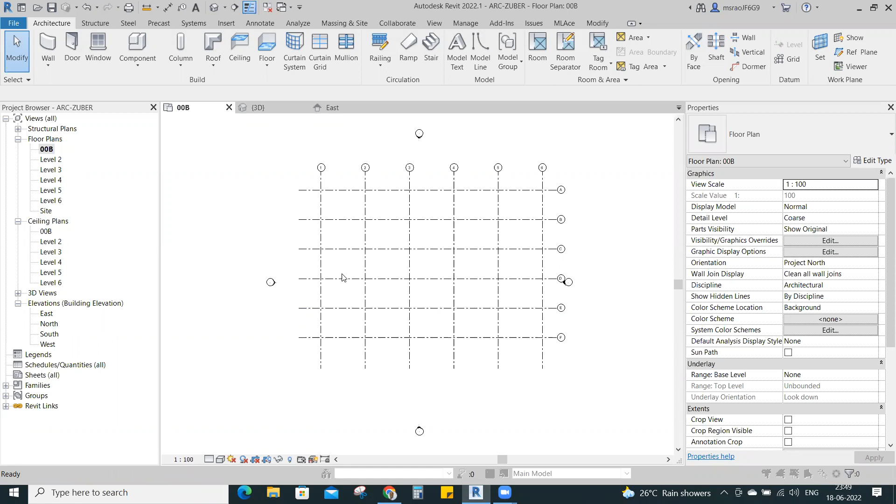Now we need to add our design according to our architecture. See, now here we have the columns - again, no need to draw the columns in the architecture. So generally, what are the elements we can see in the architecture? In the regular building itself, we can see the architectural elements like walls, doors, windows, and architectural columns.

And a roof, ceiling, floors, right? We can see the staircase and ramps - in the structure also we can see it, in the architecture also we can see it, and we can see the rooms, room name, and room numbering.